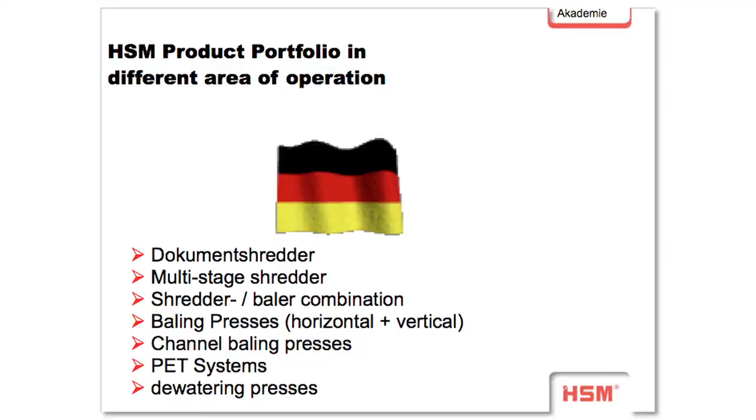And the next part is the PET. We call them PET. I think you understand under PET, small animals, but we say PET, PET. So we mean plastic bottles. We have no PET crusher. It's a little bit different, I think so. But I think it could also work, yeah.

And then we have the dewatering presses. I showed you some presses, but here we will give you more detail.

How do you save your data? That's the question. You see we have data on different kinds of material: on paper, on hard drives, on CDs, on films and so on, data sticks and so on. So the data are on a lot of different kinds.

In the new DIN, we call them DIN 66399. It's a German DIN, but we use it, I think, all over the world, because there's no other DIN in this world, and so we can use it. And we have here differences between all the different materials.

So we split now in P for paper, we split in O for optical data, for example CDs or DVDs. We split in magnetic data media, you see here the old version, the old CDs or discs, and also the credit cards. Then we have the electronic data, electronic sticks, and also electronic cards with a small label. Then we have information on film and foil.

And the next big group, a very important group for HSM, is group H. This is a separate group for the hard drives. So we have 6 different groups. All groups have security levels from 1 up to 7.

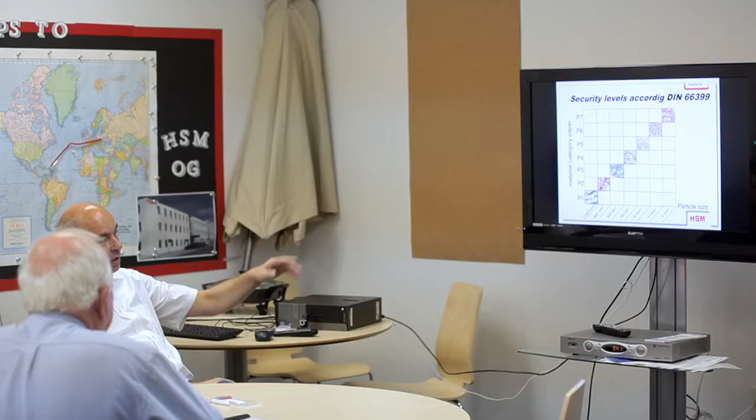We don't find, for example, a security line shredder that shreds material to P1. You find that only with big shredders, for example the Duo or the 3-shredder. And then we have P2 up to P7, and you see P7 is, for example, the highest security level with a particle size of 5 square millimeters, meaning 1 millimeter by 5 millimeters as a dimension. So we cut one piece of paper into 12,500 pieces.

And now the DIN states it's not possible to replace the particle. By P1, it's possible, it's easy to replace and reassemble the sides, because you only have a few lines, a few strips. But with 12,500 pieces, it's impossible to replace the part. So it's a cutting size very special also for the NSA here in America, and you sell a lot of these machines with this cutting size.

The umbrella brand is every time HSM, you see. And then the product lines, for example, is ShredStar. ShredStar is the entrance level for the shredders. Then we have the classic line.

The classic line is a line which grew over the last, I think, 20 years. And you will see that there is a total, the same design, for example.

And then new is the security line, and you see we have here a line from the C group, we have B and P groups, but all the shredders in the security line have the same design, the delta windows, and you can see this shredder is HSM because the design is very clear - it's only made by HSM. So we can see the shredder in pictures and in other parts and say, okay, this really is HSM Securio.

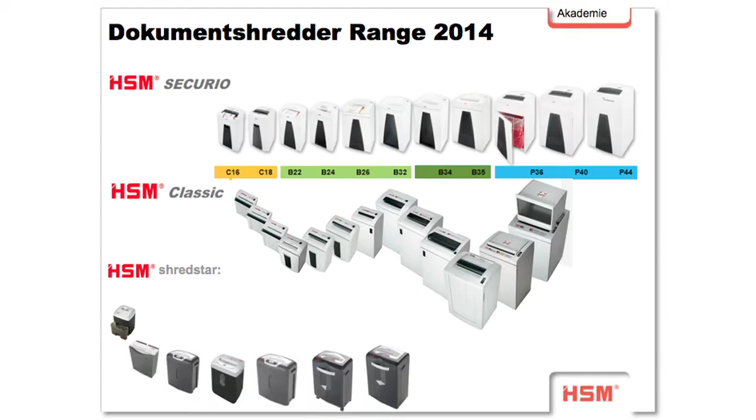Then the ShredStar is different in the design. You see here the black version with the silver top, for example, so it's very clear that this is only the ShredStar. We need ShredStar for the entrance level, and especially here in America, it's a very huge market for this kind of machines.

By Securio, you know, we split in C, in B, and in P. C is the machine group for the private or home office, so we can use the machine for 1 to 3 persons maximum. Then we come to the B line, B22 up to B32. This machine is for the workplaces. I think you will find them in normal offices very often. So we can use the machine with up to 5 people.

And then we have the large offices up to 8 people. And the professional class is the P, beginning with P36 up to P44. So we can operate them in floors or in departments. And this is a machine which you can use for up to 15 people.

Now we have the Blue Angel. I'm not sure if it's very important here in America to have a Blue Angel. You know the Blue Angel? No? It's a certificate in Germany or also in Europe, and it stands for low energy consumption during working, durable construction and avoiding environmentally harmful materials. So it's a very important label in Europe, and we have this label now for all Securio machines.

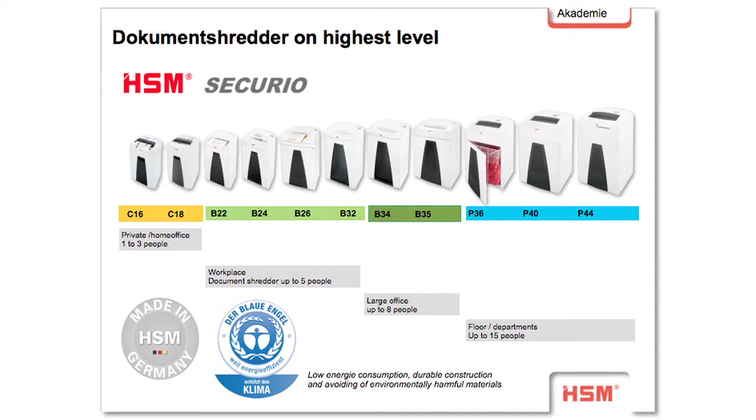And I think you can describe to your customer what's behind this label. You find this label in Germany on a lot of things. When you buy a bottle of paint, for example, you find the Blue Angel on it, and a lot of products have Blue Angel. Some people look at the products: this has a Blue Angel, this has not, that is better. So it's very important in Germany and also in some European countries.

Okay. Here you find a table which shows you the whole range of Securio. You find here the security levels. Here you see P1 is empty. We have no machine that cuts P1. We start only with P2. And you are wondering why we have no P3, for example.

You have to know that we have a new DIN now, and the old P3, where we had a lot of machines, is split, because the old P3 was 320 square millimeters and the old P4 was 30 square millimeters. So it was a big group, 320 down to 30. Now in the new DIN we split P3 into P3 and P4. The new P3 is 320 square millimeters, and the new P4 is 160, the half.

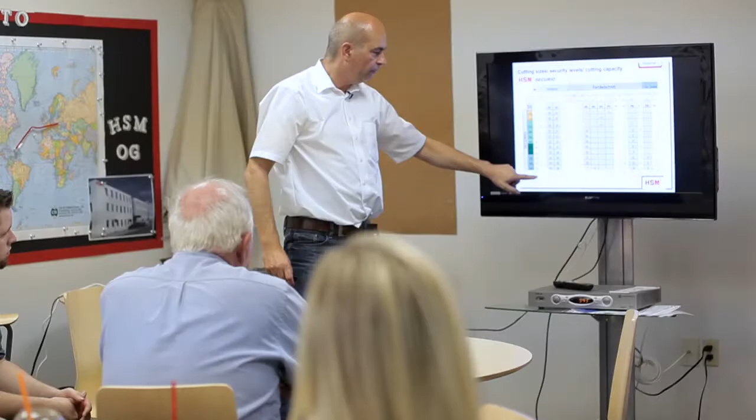So you find here everything. You find also the capacity of the bin in liters, starting at 25 liters up to 205 liters. And these numbers tell you how many sheets of paper you can cut in each. So you have, I think, a whole overview of what kind of options you have in this product range.

It's clear for you. And on the back side, you see the CD cutting unit, CD or OMDD. And you see we have only the options by P36, 40 and 44 to adapt an option with a separate CD cutting unit. Yeah?

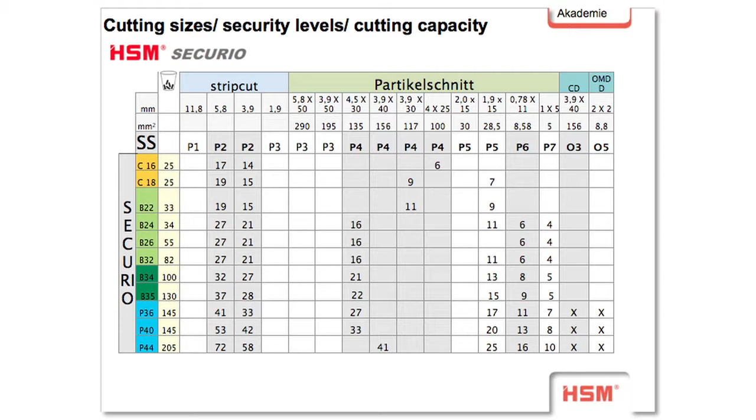Okay, then a new novelty in 2014 is the auto feed unit. So you see the same shredder with an adapted auto feed magazine, and we presented them at the last trade fair in spring. And it's possible with this one, AutoFeed AF 150, you bring 150 sheets of paper into the magazine, and the machine pulls piece by piece and shreds them.

And next we want to create 300 and also 500, AF300 and AF500. So it means maximum you can put 500 pieces of paper in a magazine. Will it just pull one sheet at a time, or does it pull multiple? Only one sheet. And it's very, very close to the system of a copy machine. It also takes one piece after the other.

But sometimes you have metal clips, and then it has to bring two pieces. Right. And when you have too many papers with metal clips, it can be a problem that it jams here. So you have to be sure that you have only single pieces or only 2 or 3 maximum clipped with a paper clip. Mm-hmm. Yeah?

The next one: when you have put in 500 sheets of paper containing highly confidential data, then you have to stay close to the machine and wait until the paper is shredded, because otherwise a third person can take the paper from the magazine.

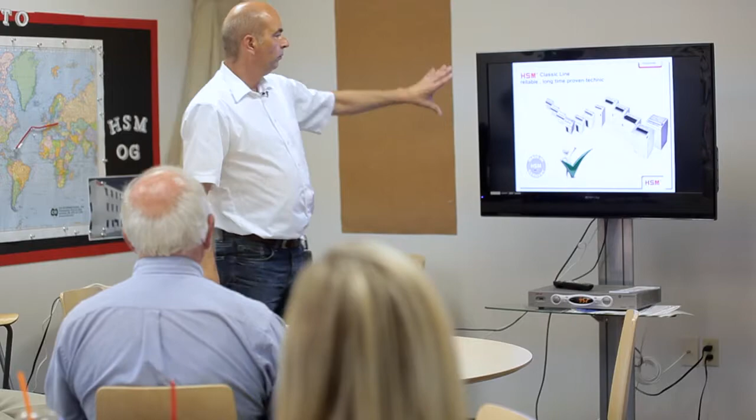Okay, the Classic line, you see, reliable, long time proven, and it has grown up over the last 20 years, for example. Normally, the goal was to replace the Classic line with the Securio line. But I think dead people normally live longer, yeah? And we have the problem that a lot of customers and a lot of salespersons say, okay, let us keep this machine a little bit longer.

We want to sell Securio, but we need them in the background and also want to sell this machine, because here you sometimes have a little bit cheaper technology and electronics, for example, so the salespeople want to have both at the moment. But I think we will leave this range in the next few years and concentrate on HSM Securio. But I'm not sure when the time is coming. Yeah.

Here you find the same list and the same table. You see all the machines which we have in this portfolio, and all the same logic here, the security level, how many pieces of paper you can shred at once, and also the capacity of the bin.

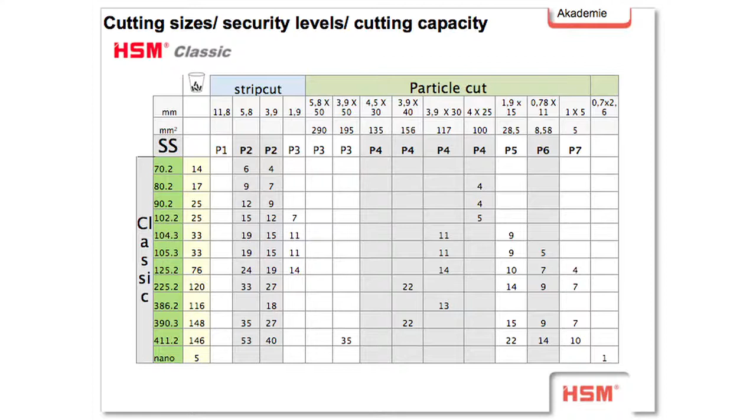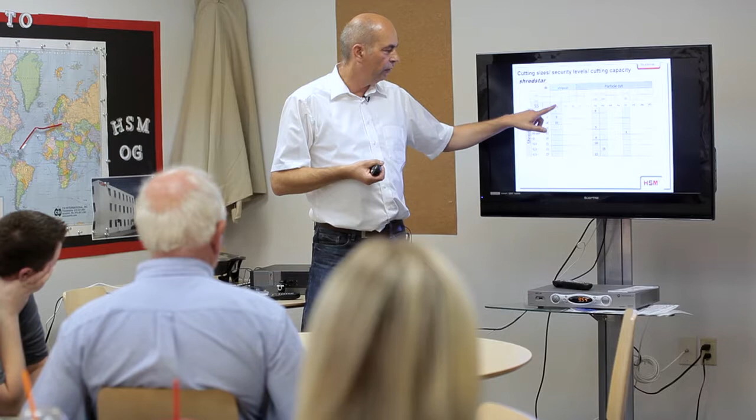You see here very clearly S5, S10, X5. When you see the list here, S5 means 5 sheets of paper are possible, and S means we have security level 2. When we have X5, for example, you can cut 5 pieces of paper at once, and X means we have security level 4.

And we have only one machine with X6 Pro. Pro means one level higher. It's the only machine which we can produce with level 5. So this system is very clear, some machines and only one option. Yeah?

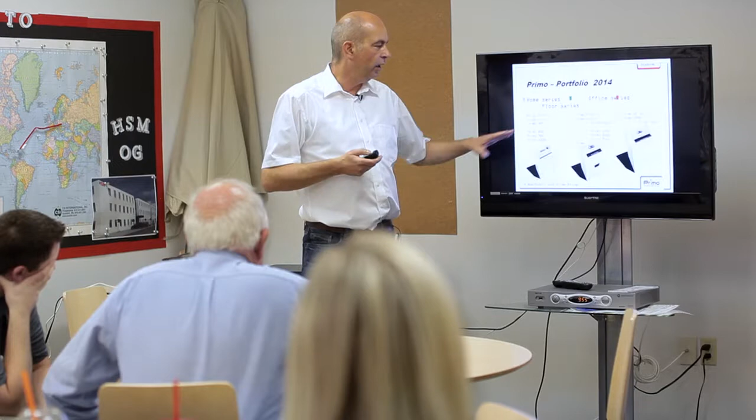Okay, Primo. I told you something about Primo. Now we have a new design, the same logic as we have by Securio: the entrance level, the next level, office level, and the DS series. And you find here the list. It's a little bit mixed.

I'm not sure why. We find here the blue one is the version with the own design, and the black one written is only the old version based on the classic line. So you find the classic machine with a new Primo label. But in the next few years or months, we will have only blue machines, only with a new own design.

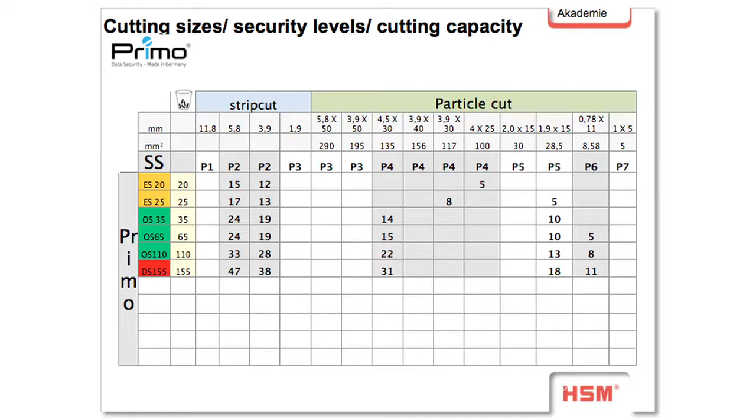The same logic in the list again. So you can take your list when you want. You can print it out when you need it, for example. Now we come to the power line machine.

You see this one is also a little bit older machine coming from the classic line, but it's also a 3-phase machine. And the most important machine, I think, is the FA400, and now also the FA500.3. And I think it's also machines which you have here in your showroom, and you have it also in the market. I heard it from you.

Here also a list which kind of security level we have. So you see here P2, 3, 3, and also we have now a machine, the FA500, in P5. It means P5 we are only able to shred with a unit with 2 cutting units. So in the same machine, the same covering, you can find a machine with 1 cutting unit, and from outside you see no difference. And when we choose P5, then we have 2 units.

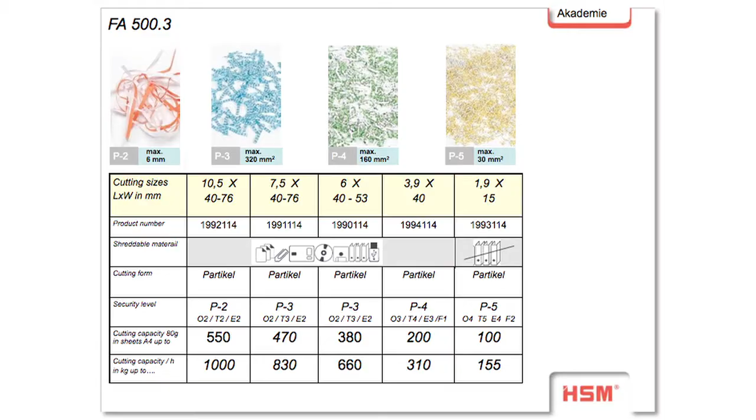I think you don't know the machine with 2 units. You only know the machine with 1. You don't have them, yeah. Okay. Be happy that you don't have it, because it's not easy for a technician to change the cutting units.

I can see that. When you want to change the first cutting unit, you have to replace the second cutting unit before, and then you can lift up the first one, because they are connected with one screw. Are they driven together? No, they have a separate motor. Each unit has a separate motor. Interesting. Okay.

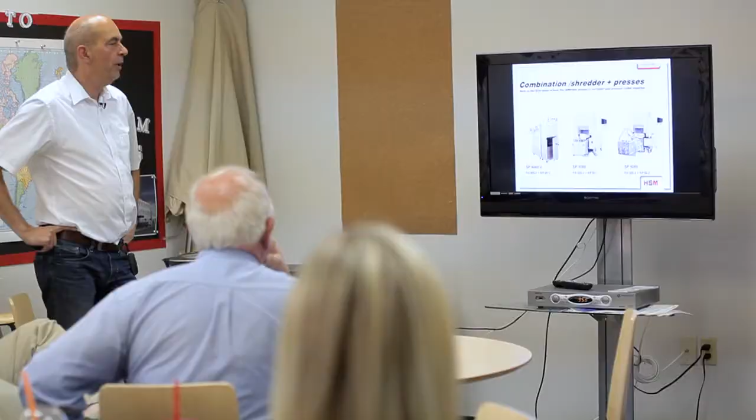So here some details, but I think it's clear for you. You have here the table, and you can adapt an additional table on the left hand or on the right hand side to make it easier to work with them, for example. And here I will show you the possibilities of the combinations. You see here the

SP4040V, for example. SP means shred press combination. The first 40 comes from the FA400, and the next 40 comes from the KP40. And V means vertical press. So the KP40 presses the material from the top to the bottom side, internal of a cupboard or a frame with a plastic sack. Both are possible.

And the next one is a combination with the FA500. I find also two machines, FA500 plus KP80. And then we create an SP, shred press combination 5080. So you find the machine FA500, and under the machine you find the horizontal press KP80.

KP80, for example, is a press which presses the material against the counterplate. And when we have the bale ready, we have to open the counterplate via a hydraulic locking system, and then we can flap up the counterplate, and then we can press the material in a sack. And by

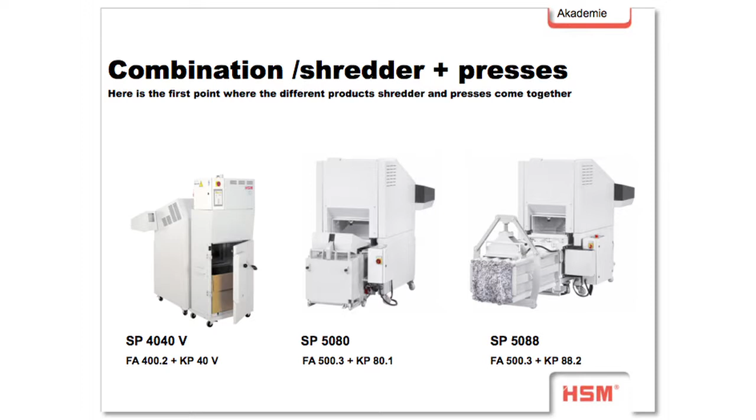SP5088, we have the smallest channel baling press. This is the same principle as you find by the big VK press. So we have a channel, and internal the channel there's the material, fixed bales, strap bales, for example. And here's a hydraulic unit which reduces the cross section of the channel, and so they brake the material internal the channel, so the material is not able to move while we are pressing the new material on the back side of the bale.

And then when we press the material on the back side, we advance, for example, 10 or 100 millimeters. And when we reach the position and the maximal pressing power, then we open the channel, and then we are able to move the material. And this is the principle of a channel baling press. We will learn something about them in detail when we go on a machine. So we have three possibilities for combination.

Here, more in detail, you see that internal is a cupboard, for example, and the material comes from a shredder over the slot here in the cupboard, and when we interrupt the light barrier internally, then the press starts automatically.

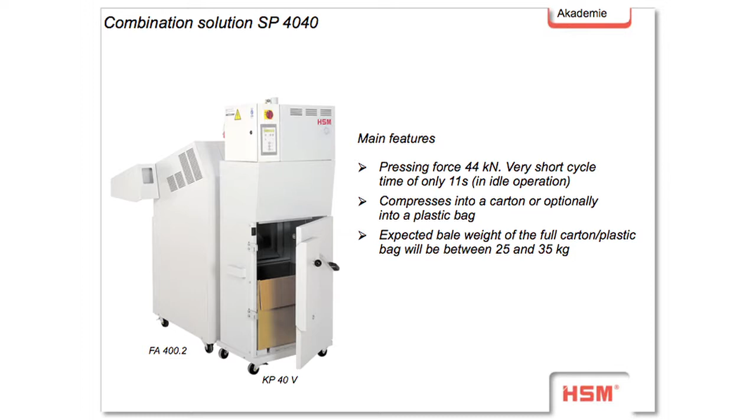And when the press or the bale is finished, meaning the press ram is not able to go deeper, we get the information that the bale is ready. Then you can open the door and remove it. So will it stop the shredder while it's compressing? No, when the bale is compressing, you can continue to shred. It just waits to feed into the baler until it's okay.

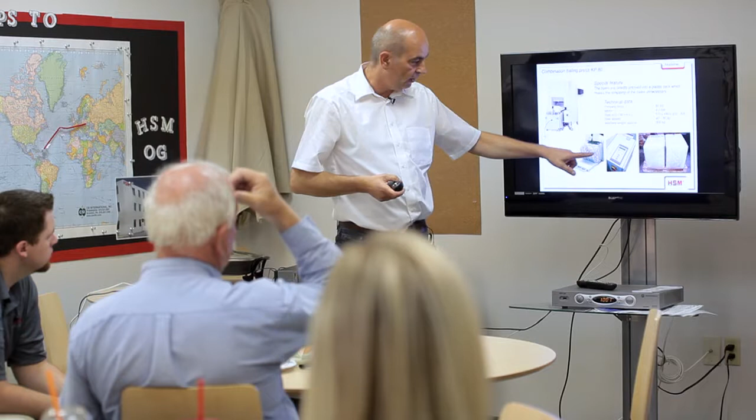So the situation with the KP80, you see here this is the counterplate, and when the bale ready signal appears, we have to stop because we have to remove the bale. We unlock the door here, the small hydraulic cylinder with a two-hand operation, then flap the door by hand to the bottom, and press out the material into this plastic sack. It's not possible to strap them, you can only press them into a sack.

And then you see here the sack, you can bend it and fix it on a Euro pallet. A Euro pallet is a little bit different than the wooden pallet you have here in America, but we have fixed the dimensions so that two bales can be fixed on a Euro pallet.

And this is the general baling press, the KP88. Some details here are not so important for you. The pressing force is 8 tons, for example. But the most important thing is that we have a bale with a dimension of 500 by 500, and the length of the bale is variable, so you can adjust it, for example, to 500, 550, or 600.

We can see how it works in the display. You can choose how long the bale should be. Maximum 950 is possible. Here we say, okay, maximum 600, but the display allows you to increase the bale up to 950. But it makes sense to shorten it to 600.

Now we come to the next machine, the Hard Drive 230. I told you it's a new machine, no, I think we've had it now for 2 years. And here you see the 2-stage machine. Over here by HSM in the showroom, we have the 1-stage machine.

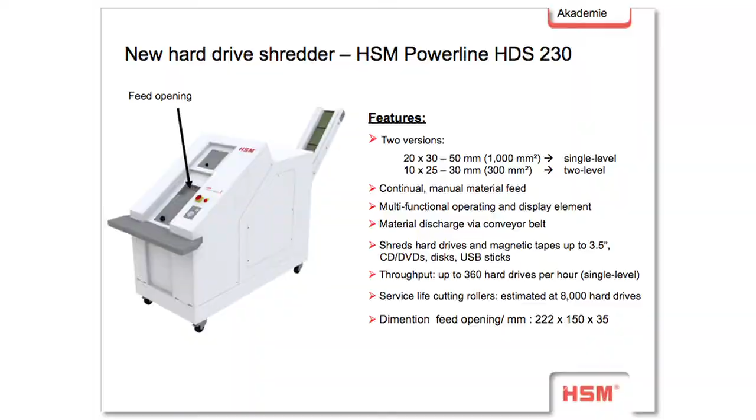1 stage, or single level, means we crush the hard drives into pieces of 20 to 30 up to 50 millimeters, and that gives us H4 security level. With the 2-level stage we get smaller pieces, 10 by 25 up to 30 millimeters, and we call that H5. Here you see the result, H4, and here H5.

The reduction, or destruction, of the data stores is unrecoverable. So you can be sure that all data which was on that data store is destroyed forever, for hard drives as well.

Do we have more material sometimes? I think then you need bigger machines. So we have bigger machines. One is the duo shredder.

Duo means we have 2 stages, 1 or 2, and also here 1 and 2 — this is a mistake in the picture. The duo shredder means we have a maximum capacity of 800 kilograms each hour at security level P3. You remember P3 means 320 square millimeters.

And now, because of the new DIN standard, a lot of customers called us asking if it's possible to get the machine in P4. So we developed a new cutting unit where we can cut all this material to P4, but then we reduce the capacity from 800 to 500 kilograms each hour.

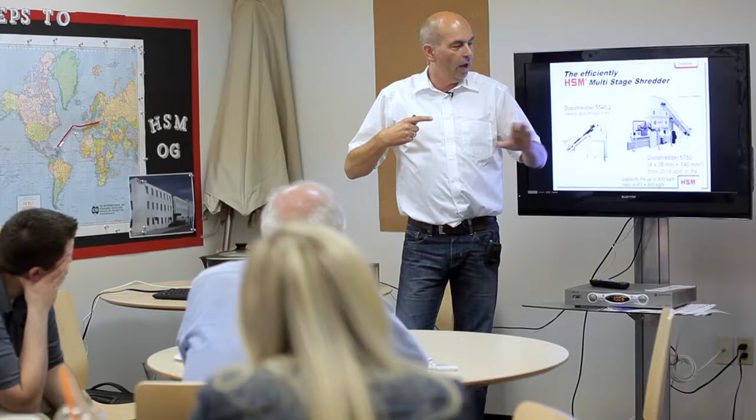It's very important, because when we have a cutting unit with cutting size P4, we measure the electricity internally in the system, and when we have a high electricity consumption, the cutting unit is just before jamming. In this case, we have to reduce the speed of the cutting unit beforehand, so we reduce the hertz from 60, for example, down to 50, and so the cutting unit runs a little bit slower, and the material volume is reduced also.

And then the next cutting unit doesn't jam. So we have to control each one, this one and this one. Also when we have a high consumption in the first unit, we can reduce the speed of the conveyor belt, and so reduce the material capacity. This is only necessary by P4. P3 runs with normal turnings.

But P4 is a little bit more critical for jamming in the last unit. Are those adjustments automatic or manual? Yes, they're automatic. They measure the energy consumption in amperes. And when the ampere goes higher, it means the cutting unit is just before jamming, working too hard. Then there's too much material in this cutting unit, so they have to slowly reduce the running speed of the cutting unit before it.

Although we have this system with our Trishredder, now we have 3 stages which we have to control, and we also have the Trishredder P3 with normal motors. The motors are always the same, normal motors, but without frequency control. But when the customer wants a smaller particle size and higher security level, we need frequency control in the machine, and here it's a little bit more complicated.

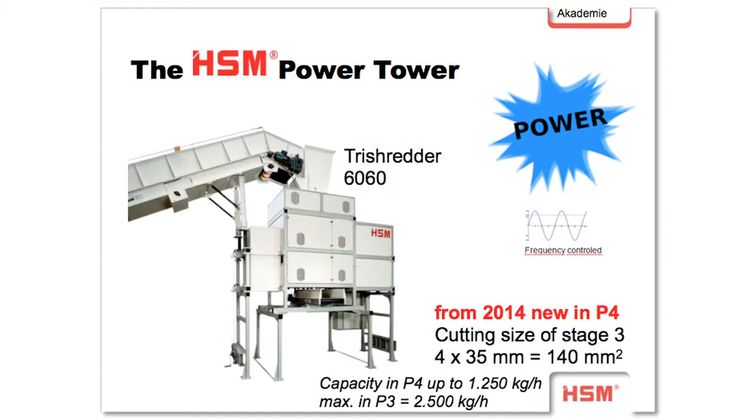So we have to control when some units run very easily with low energy capacity, low ampere. Then we can speed up the units to bring more material inside. And when we have high consumption, we have to lower the speed of the cutting unit before it. So it's a control of each unit together - we can speed up or lower the speed of the motor and the cutting units. It's a very complicated system, but it works automatically.

But we have installed only a few units, and our electrical technician was on site at the customer's location to make the adjustment directly on site. So it's not so easy, because everything changes with the power from the actual building. So you'd have to adjust to the building, right? I'm not sure if it's just to the building.

We will find this frequency control system also in the big baling presses. Because when we learn something about hydraulics, we learn that when a motor is running at a fixed speed, for example, the pump is also running at the same speed. And then we always have the same volume of oil. And sometimes we don't need so much oil because we have big cylinders in the machine, and we have small cylinders too.

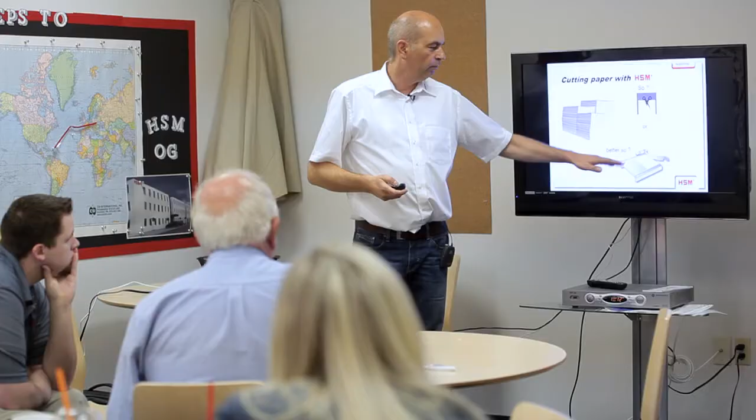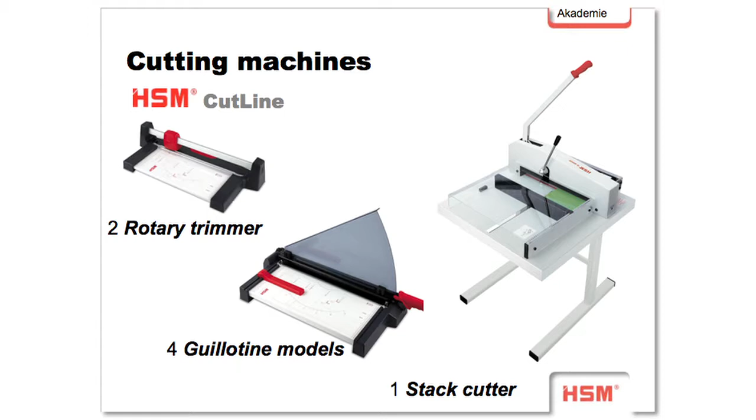Cutting paper is possible with scissors, or possible with a cutting unit from HSM. So we have different cutting machines - we have 2 rotary trimmers and 4 guillotine models, and 1 stack cutter. I'm not sure if you know all of them. This one is produced by HSM, and these models we also buy from our partner in China, and so we have no replacements or spare parts for this part. We sell them and hope they work for a long time.

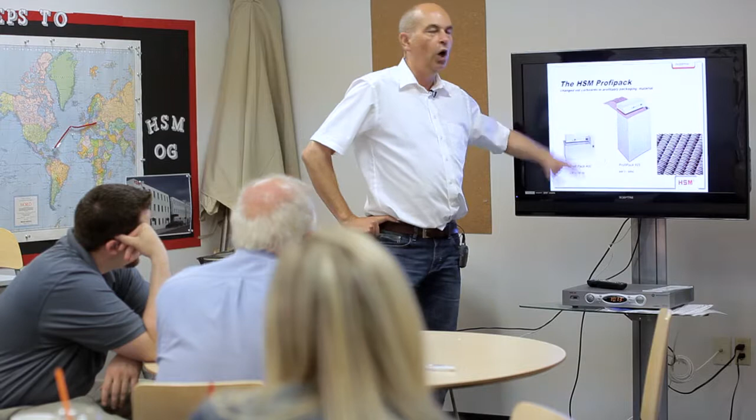Now, safety pack for shipment with HSM. You know the machines, we have here our 2 Profipack models. The smaller one with normal voltage, 1 phase, 110 or 120 voltage here. 120 here, and 400 or 208 in America, 3 phase or 1 phase. So we can produce our packaging material with old cardboard which our customer shipped us in our stock. And so it makes sense when you get a lot of cardboard inside or coming from our supplier, then when we need such packaging material, it makes sense, such a machine.

Now we will come to the baling presses. Reduce volume and transport material cost effective is the most goal by all baling presses. So we have this kind of cardboards all over the customers, by our supermarket chains for example. Every product is stored and delivered in such cardboards. And it's possible to bring them in a container, but you have a big volume but a less weight. Our goal is to compress this material in a bale, and then you can bring the bale on a truck. And I told you in the beginning, the goal is to fulfill the maximum capacity and weight, 24 tons in German trucks.

Do you know how high is the maximum weight on American trucks? You don't know? I think sometimes when I see them on the road they are a little bit bigger. But in Germany, we have the maximum load with 24 tons.

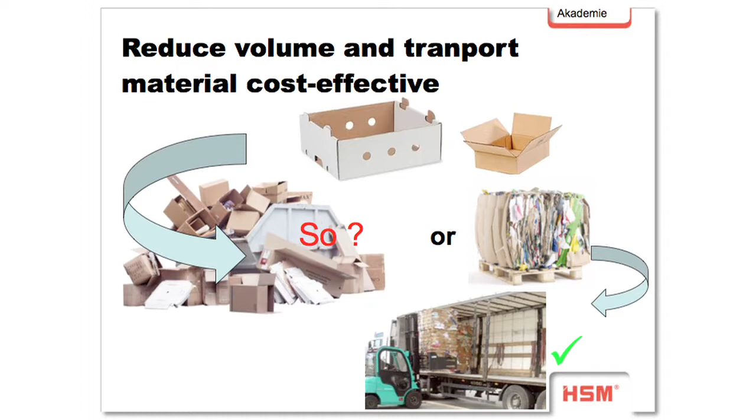In this case, for example, we have a bale from a V-press 1160. So we have a size of 1.20 meters by 1.10 meters deep and 1.20 meters high. And though we can fulfill this lorry by 2.40 meters, and the length is approximately 13.5 meters, then we can bring in 44 bales, and then we reach the maximum weight of 24 tons. This is the goal of our customer, to reduce the transport costs each ton. The lorry and the driver have the same cost if we transport 10 or 24 tons. And so we want to fulfill this.

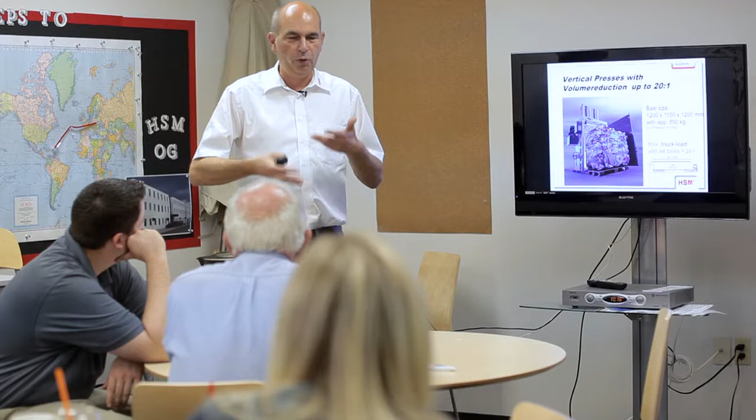And sometimes customer called us and said, our bale weight is too light, we only get 22 tons on a lorry. Then our technical have to go inside and replace or make some resettings that we get the most possible weight of a bale. This is an overview of all our V-presses.

We start with press 60, V-press 60. It's the only press who make no problem because it's a press you work by hand, or you can operate by hand. Here we have no hydraulic system, we have no electricity. And this is a machine we don't produce by HSM, we sell them from another company.

But it makes sense as additional in some factories or in some stores. They have a little bit of foil, and this machine is only created for compact foil. So the machine is movable, so you can go with the machine to the place where the foil comes in. Then you bring the foil in the machine, compress them with your own muscles and strap them. And then you get a bale, for example, with a weight of 40 kilogram. But I will give you more detail a little bit later.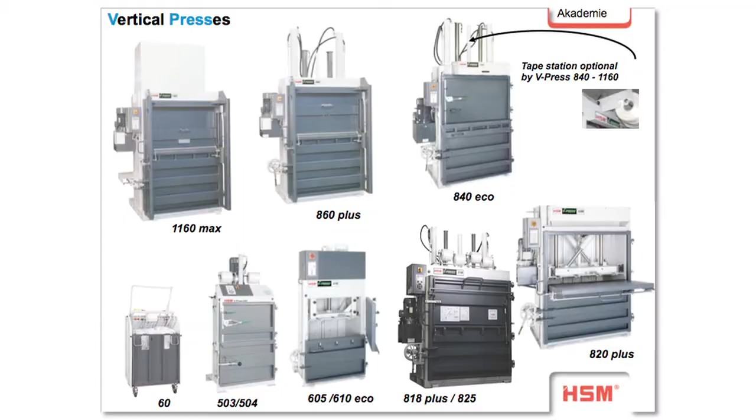Then we have here the first press, V-press 504 or 503. The 503 is forecast information because we are developing this smaller machine. And then we go to the 6 group, 6, 8, 8, and then we come here to this bigger version, 840, 860, 1160. In this group, you can strap the bale with wire, or you can adapt an option with a tape station, and there you can decide each bale if you want to strap them with wire or strap them with tape.

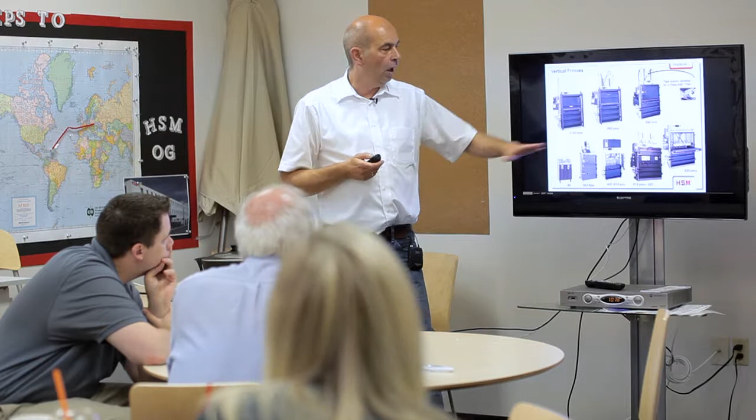By this group, you only can strap the bale with tape. And by these machines, we are also talking about a bale who has mill size, for example, so you can sell this bale directly to the paper mill. Paper mill needs, in Germany for example, a weight of minimum 430 kilogram. Bale with less weight, they don't accept. And the paper mills only want bales strapped with wire because they can pull out the wire with a magnet then, so it's an advantage for them. And then they have tape, but it's not so easy to sort the tape out of the paper.

We have some options here. The Eco version is the entrance version, a normal machine with 2 doors.

So we have only 1 door for opening the filling area or press chamber. The next one has a normal hand wheel for locking the door. The next one also has a hand wheel, but with a sliding door. Sliding door means the door opens automatically, so you come to the press and it's ready for filling. In the other case, you have to open the door before.

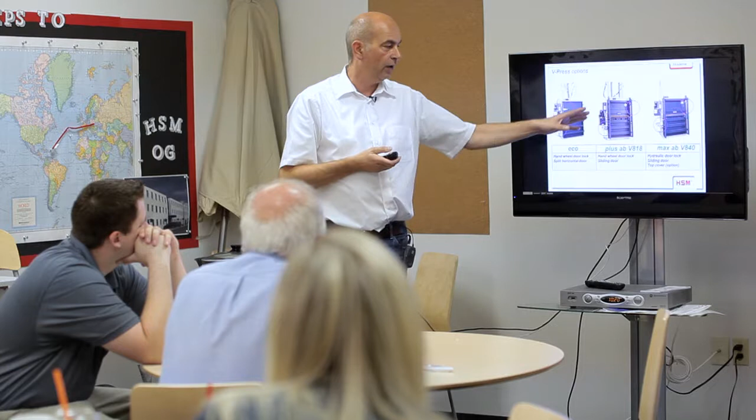So it's an advantage. The next one is the Max, beginning with the V-press 840. Here we have a hydraulic door lock system, which makes sense when you have expansive material. It's easier to lock and open the door with the hydraulic system; otherwise you have to turn the wheel with very hard power. Here you can open it with 2-hand operation, and it opens by hydraulic power.

And we have also the sliding door here, plus an option to cover the top. The toppers don't look so nice, since you have a lot of cylinders, hoses, and so on. Those are only optical covering, nothing more.

The press chamber depth means when we bring out the bale, it becomes the height of the bale. Because we turn the bale out, the depth of the bale before becomes the height of the bale once turned outside.

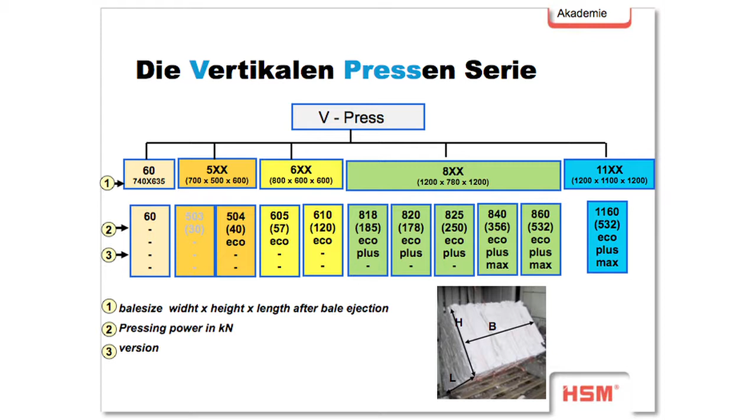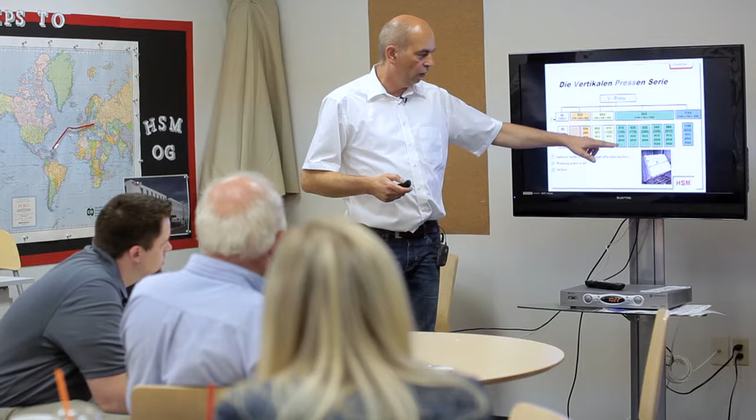And this next one shows the version, all the options in the machine that you can choose.

Then we have some special machines for the 860. Normally we need the machine for compacting cardboard or for compacting foil. There we have two options, two programs: we can choose foil or we can choose cardboard. Sometimes customers want to compact PET plastic bottles, or TV housings, or PC housings—hard plastic material, for example.

The problem is that when we bring pressure on cardboard, it's easy—the cardboard takes the pressure downwards, so it's very easy to compact cardboard. When we compact foil or hard plastic, the pressure goes outside because the material is sliding. We give the pressure from top to bottom and the material tries to go to the side walls. So there's a lot of pressure to the side walls, and we have reinforced this machine inside, backwards, and also reinforced the door, because there's a lot of pressure to all sides.

So when we want to compact this kind of special material, we need special machines. It's the same machine, the same hydraulics and so on, but the side walls are reinforced. You will see some technical drawings a little bit later.

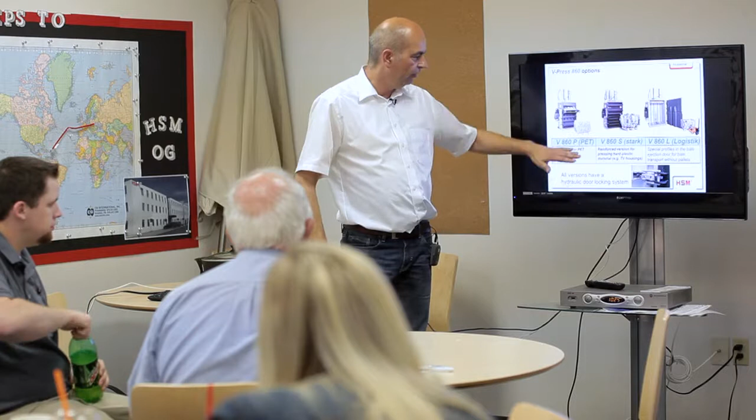All these special reinforced versions, P, S, and L, always have a hydraulic door lock system, because the material is very expansive and we want to open a door. It's not possible to do it by a hand wheel, so you need the force of the hydraulic system.

These are the bales, for example, and these are the possible weights which you can create with this machine, with the 860 S, P, and L, or the normal version.

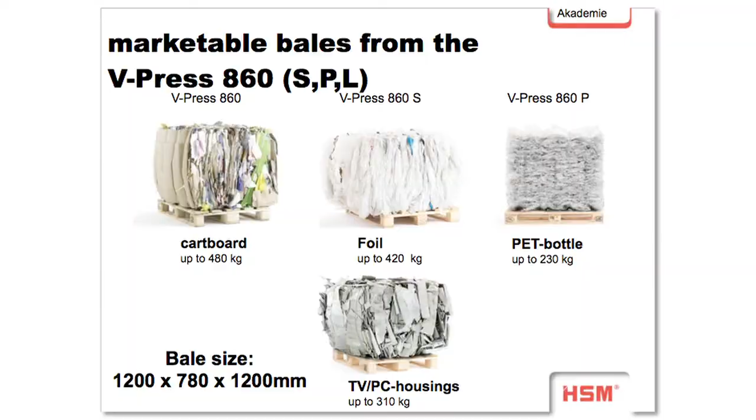Now we have a special machine only for compact barrels. We also have an example here in your stock. This is a very simple machine: bring in the barrel, close the door, press downwards, one stroke, and then the machine is ready and the barrel is flat. So we have a simple control panel, only down and up, not more. We have some needles here that perforate the barrel so the air is able to come out.

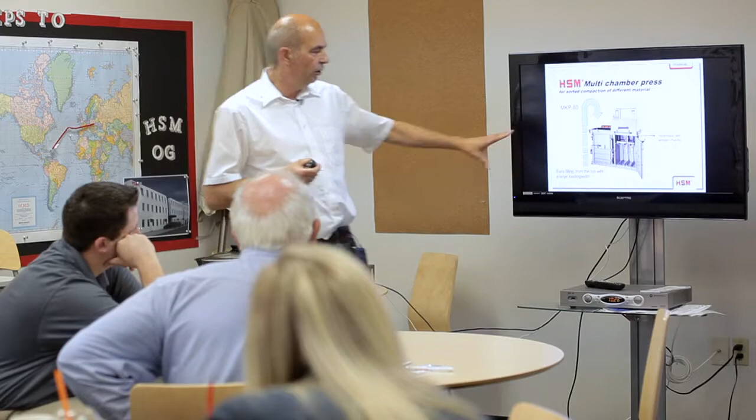There's also a special machine, a little bit older construction, with two chambers, and we have one pressing head. It's possible to fill one chamber with cardboard, for example, and the other one with foil, and we can move the press head from one chamber to the other and compress with one pressing unit in two chambers. But now the V-presses are so cheap, it's better to buy two machines.

A smaller one and a bigger one, depending on your foil capacity, while most customers don't have so much foil. It's also the situation that a lot of customers buy a V-press 860, for example, and then they buy only a V60, a hand machine for compacting the foil.

They produce a foil bale of approximately 40 kilograms. They store them on site, and once they produce enough, with 10 bales from the 60, they bring the bales to the V-press 860, bring in the 40 kilogram bale, cut off the lines, and then compact 10 bales up into a bale of 400 kilograms. That's what a lot of customers do. In the past, they had such machines.

Yeah, we have not only cardboard or only foil. Sometimes we have a heavy, expensive, or heavily compressible and expensive material.

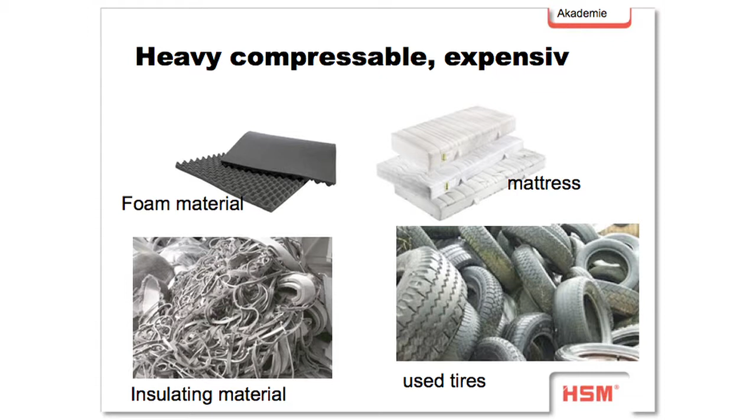For example, such foam material - you can press it and it comes back to its original form. Also mattresses, you can press them and when you release the pressure, they come back to the original form. Or insulation material, same situation.

And a very special group of material is used car tires, for example. In the market you see there are a lot of car tires. For this case we have a special machine. It's a horizontal press. We call them HL3521S, or normal, without or with S.

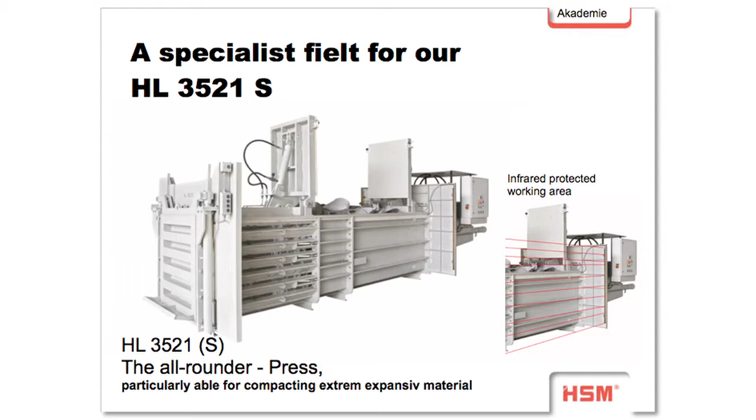In this machine we have very aggressive, movable return clasps, for example. So we compress the material in the front side and these clasps flip back and then they come out again. So we have the possibility that the material stays in the front part of the press.

This press is controlled via light curtain. So when you close the flaps via hydraulic, you see here the hydraulic cylinder. In your stock we have the smaller version, where you can close the flaps by hand, so it's your problem if you hurt your fingers. But in this case you should stand outside when you close the flaps with hydraulic power. The curtain makes sure that when you go inside it, the press stops directly.

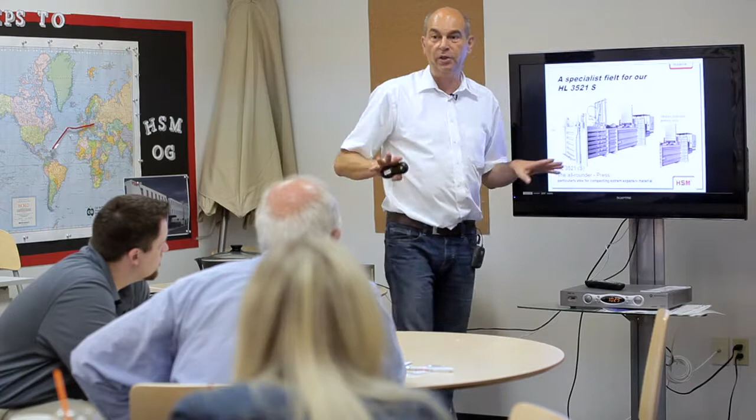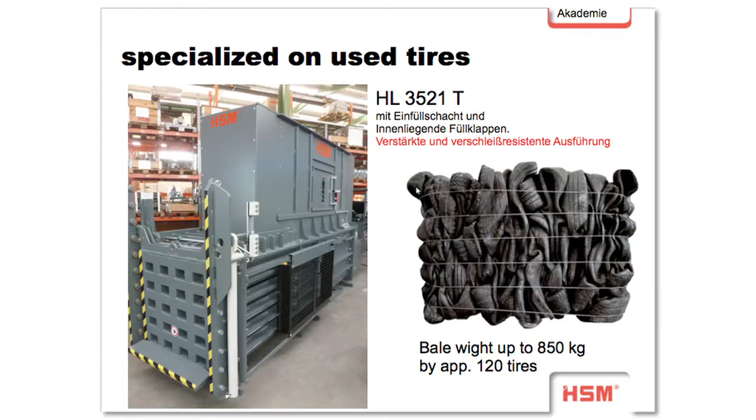Based on this machine, we have a special machine only for compacting car tires. So we have a chute here, and we can bring in the car tires via conveyor belt. It's special in France - they use this bale to produce energy. They bring them to the burning company and produce energy with the heat. This is very strongly reinforced, based on this machine.

You see here also the door. We have only this line, and here you see the door and the side walls, and all the components are reinforced for compressing car wheels or car tires. Also inside the machine there's wear-resistant material. It's called Hardox - you know Hardox? Hardox is a brand, we produce metal sheets which are wear-resistant or hard-resistant. We completely cover the machine inside with this special wear-resistant material.

I think it's a special market in France for compacting tires. So here we will find some smaller horizontal presses. This one we will find outside.

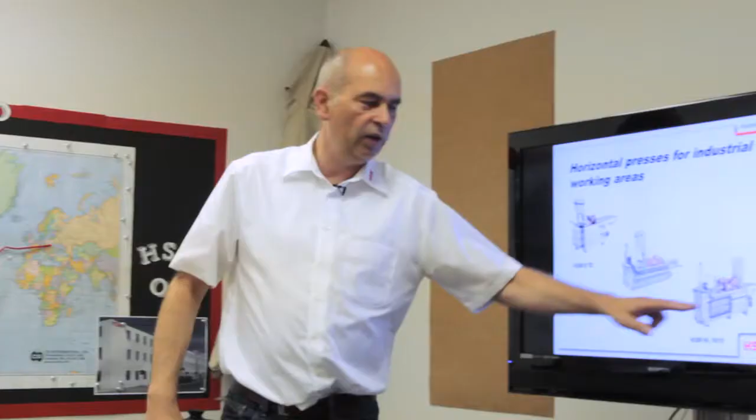Yeah, we have it in stock. I think it's a product for sale here in the US market. This is the same principle as we find in the bigger version, because we have to close the filling flaps by hand, and we also have a hydraulic system here, a hydraulic door. Open the door when the bale is ready.

In this case, as with the bigger one, we have to strap the bale with wire by hand, or alternatively with tape. There's no automatic strapping system. We are only able to strap them with a wire. We have a fixed-length quick link wire, for example. It's very easy. Bale ready appears, then you insert the wire, and then you have a quick link with 2 holes, and you can click them together and it fixes.

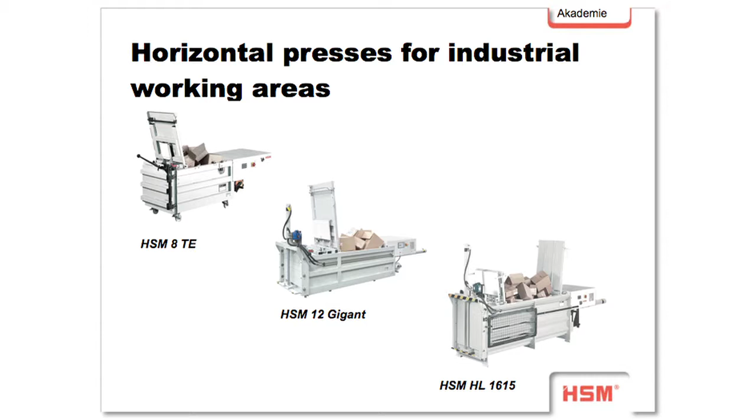The disadvantage of this horizontal press is you need a big footprint. Normally you can lift up the machine and then you have a vertical press. The same result from the press, but a smaller footprint. The difference is here you can fill the material from the top, and with the V-press you have to fill the material from the front side. This is the difference. But I think this is not the biggest market now. The bigger markets are the V-presses.

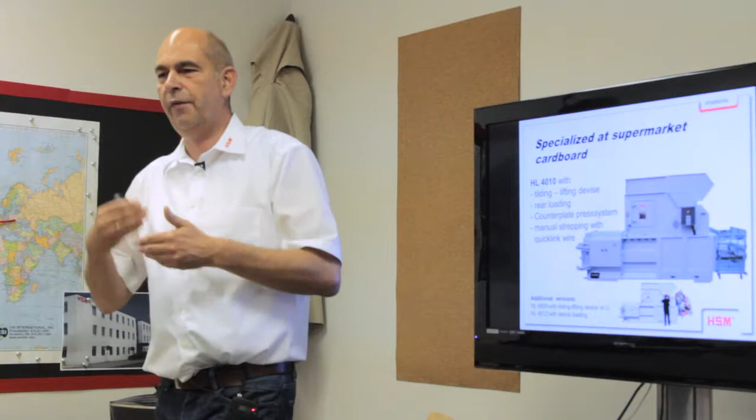into the press chamber. Inside we need a very long press stroke because we press the material up to this contact plate here, so we normally need a long stroke with the cylinder, and normally the cylinder sticks outside here. Because we don't have enough space in Lidl stores, we have a special construction, as I told you, with 3 cylinders, first stage and then the second stage.

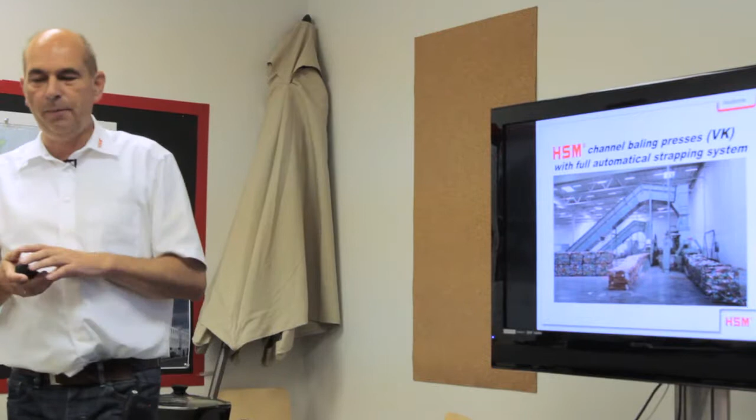We sell a lot of this machine. We sell them to Lidl, but it's also possible for other companies and customers to buy this machine. But at the moment, most of them go only to the Lidl chain. Now we come to the big versions. We call them VK. VK means in German voll, full automatic baling presses.

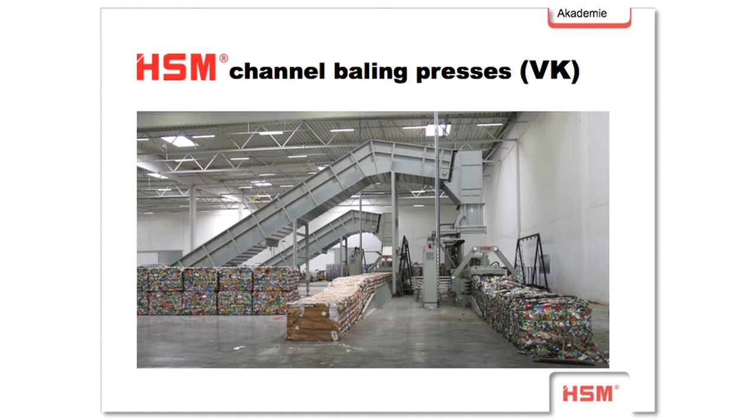Full automatic means that we compact the incoming material, we have a conveyor belt, we have a start system with light barriers, for example, then the machine starts automatically, and we measure the bale length, and when we reach the adjusted bale length, for example 1.20 meters, the machine stops and we strap the bale with wire fully automatically. So the operator only has to control the main system, but he has to do nothing. Only react when there is a fault. Otherwise he can work on other things, fill the material onto the conveyor belt, for example.

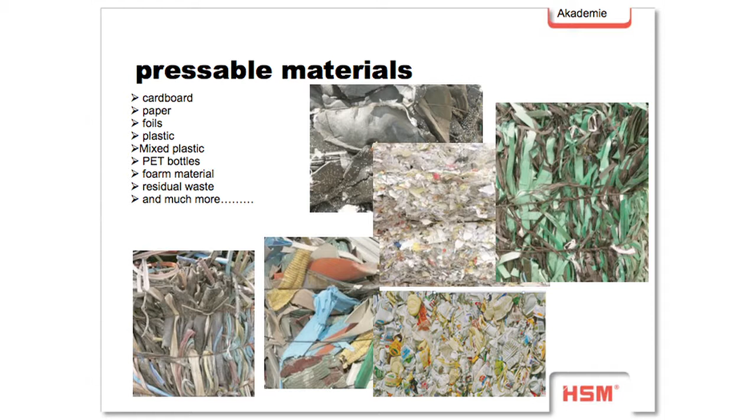So here we have a lot of different material which we compact. These machines are very often located at disposal companies. So we have a lot of different material, plastic, foil, paper, foam material, and so on. And it's a different situation each time. Here is an overview, but this is not so interesting for you, and I will flip through it a little quicker. Only important for you: we have machines for small material loads, and we have machines for heavy disposal loads.

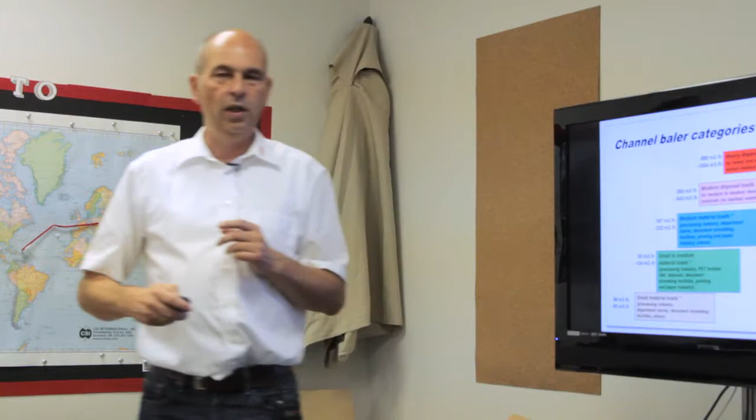So we have a range from 36 cubic meters each hour up to approx 1100 cubic meters each hour. So you can imagine the range of different presses. On the next slide, you will see some machines. This is the machine which we have outside, a KP, the smallest press. And then we find here a lot of different presses.

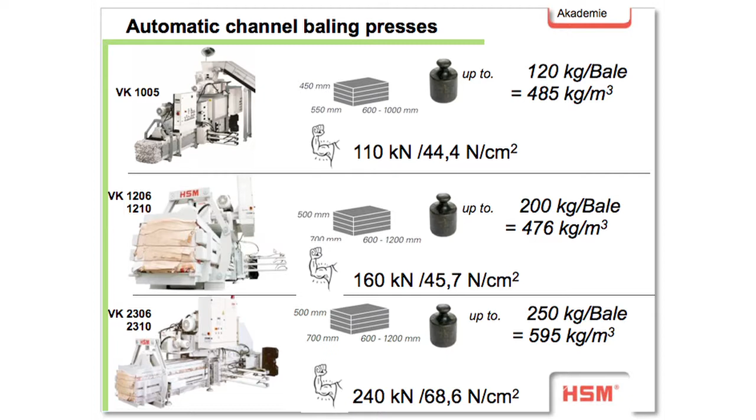You see here the insertion cylinder. This is a channel, and it works identically to the machine which we see a little later. Here is the insertion cylinder, here is the wire station, and so it works automatically. And now you see here the different machines, different bale sizes, and also different power, pressing force, and so the resulting bale weight increases also.

I go a little bit faster if you want. You have the details on your stick. So these are special machines for the disposal companies. You see, we also produce a red one. This is one. The customer wanted the red one in combination with gray. It looks very fine. And also here the blue one. So the customer wants to have different colors.

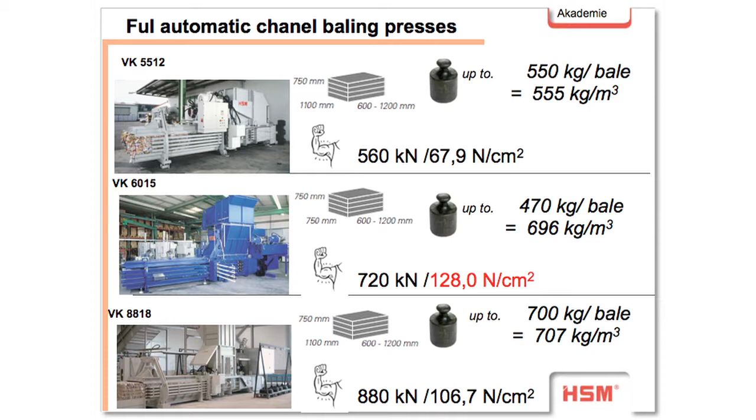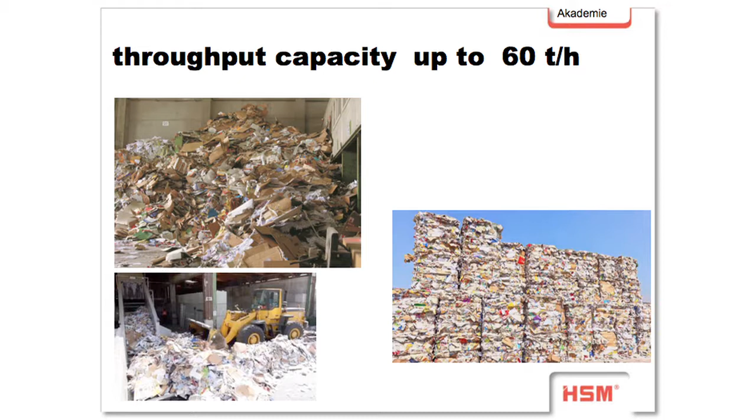Here you see a disposal company. You see a huge amount of material here, and they bring the material with a kind of, not forklift, what's it called? A front loader, okay. The front loader brings it into the conveyor belt. It's an underfloor conveyor belt, and they only move the material with the front loader into this conveyor belt.

And this conveyor belt is up to 2 meters wide. And you can think about how much capacity you can fill in this conveyor belt. And then this conveyor belt is connected to this hopper here. And then you see the bale come out, and every bale is strapped, and then they bring them away with a forklift.

Okay, here you will see some things about the frequency controller. I told you that we have a frequency controller, so we can reduce, for example, the drive power from 55 kilowatt to 45 kilowatt with the same performance from the machine. So when we need a lot of oil volume, we can speed up this motor in frequency, and so we can produce more volume.

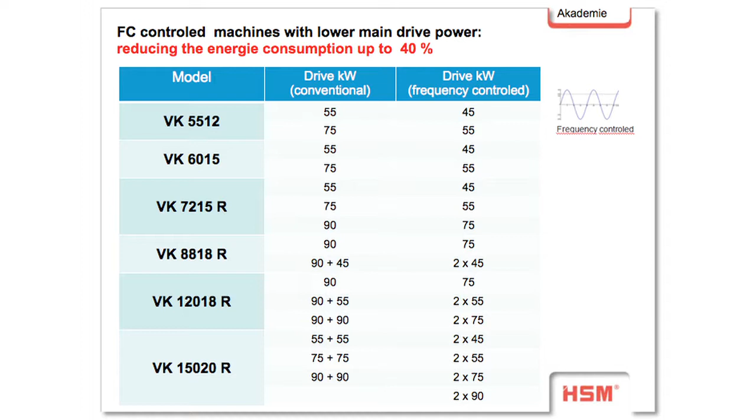And so we can reduce, we see here 180 and here only 150 kilowatt. So we reduce the energy consumption, and so we save money working every day. Okay.

So here's a special press. This is a briquette press to make briquettes from plastic bottles, for example. So we have 3 chambers. The first one compacts the material in this way. Then we compact the material in this way, and the last stroke comes from the back side. And then we press the material in this small press channel, and we reduce it to 25 by 25.

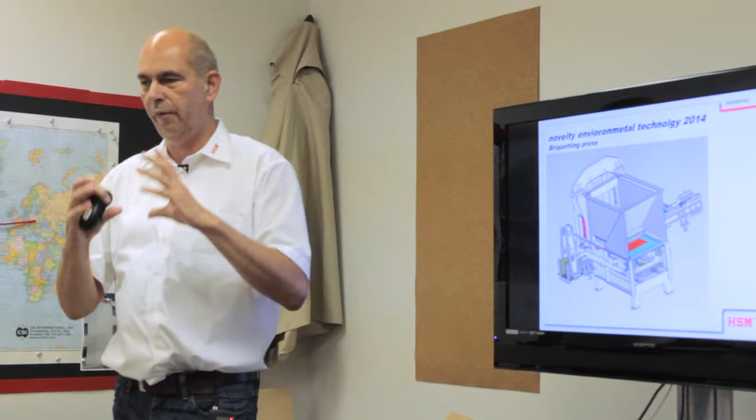Very hard briquettes. The briquette is as hard as a stone, you see it, and it's not necessary to strap them, you can put them away, and so we have the most possible reduction of the volume. It's only developed for plastic bottles.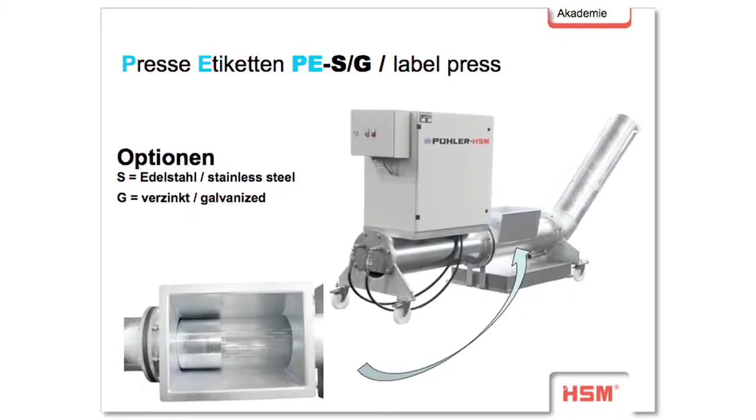So then we have the dewatering machine I told you about. Here you see the machine with a hydraulic cylinder, and the next one has an internal screw, but it's the same. Here comes in the wet material, the wet labels, and we press out the fluid and bring it back for cleaning, so it's possible to use the cleaning fluid once again. In this way, we press out the labels, and so we get paper, a small bale.

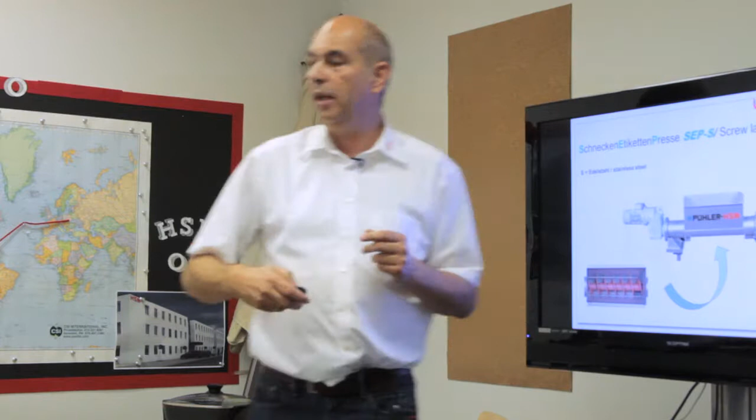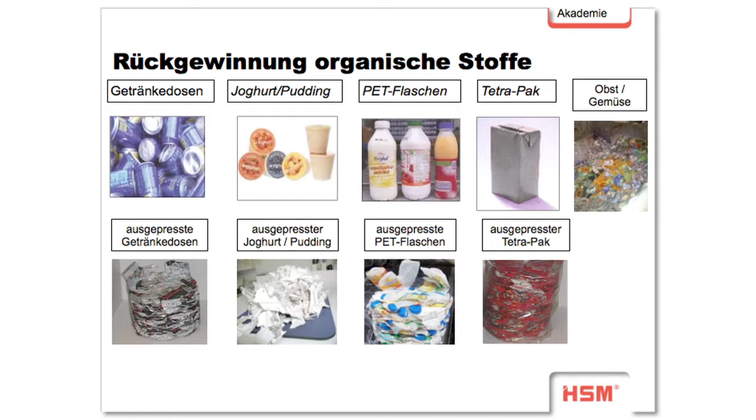The next machine is only for pressing out misfilled material. For example, misfilled beer bottles or juice bottles, aluminum cans, misfilled yogurt bottles, or misfilled plastic bottles with juice and so on. Misfilled means wrong labels or anything on it. It's not possible to sell this product to the market.

And also Tetra Pak, so we can split the packaging material and the fluid with this machine. The fluid normally goes to biogas companies, and they produce energy with the fluid, and the material goes to a waste company.

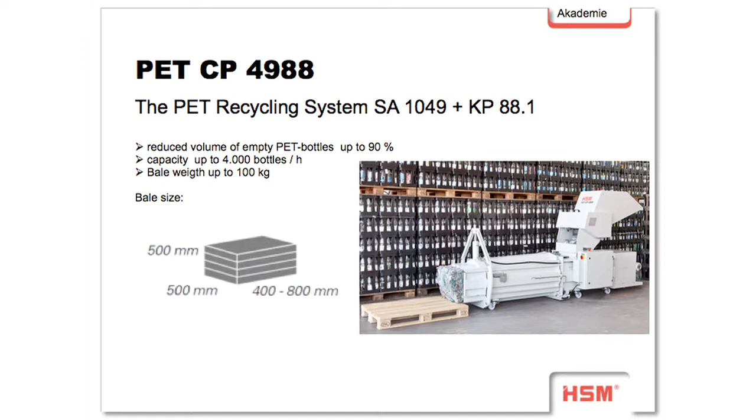Okay. Some part here, I will show you a video a little bit later. And we will also show you a video of this machine a little bit later. There are some special machines to compact full or misfilled bottles or empty bottles, only for PET. We think that one's going to be a big thing here. You have this machine also here? I have a video of this machine, and we can see it a little bit later. Okay.